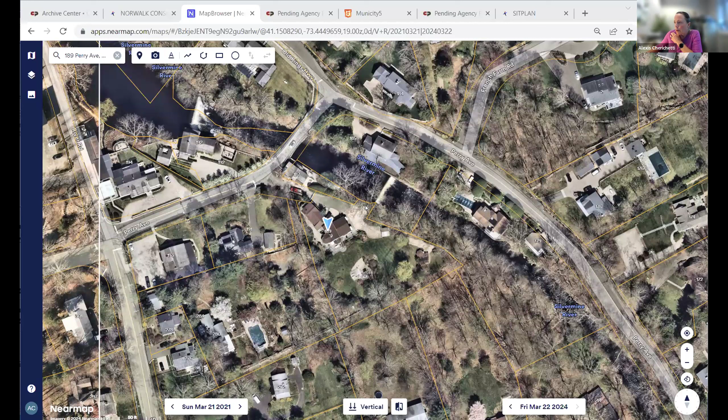The reason that the applicant is here tonight is for some activities that were done without a permit: the expansion of the driveway here, a little bit of gravel here, and the installation of some dry wells kind of in this general location. And I will stop my share, and I believe Mr. Carter is here this evening, as well as engineer Wayne Devanzo. So if either of you... Yes. Hi. Hi, how are you? Good evening. For the record, Wayne Devanzo, Fairfield County Engineering, on behalf of the applicant.

Yes, there was some activity here. As Alexis pointed out, the gravel driveway was expanded. I'd like to share my screen if I could. Yes. So you could hopefully see. Does everybody see that? Yes. Okay. Yes, so the gravel driveway was expanded in this area, if you can see where my cursor is, and a gravel area was added down lower.

So to mitigate the extra runoff from that, we did a stormwater runoff analysis and designed a retention system that we will be installing in this area east of the house, beneath the gravel driveway. It mitigates the 2 through 100-year storms. The 2 existing dry wells will be abandoned, and the majority of the roof will be routed to the new retention system. Erosion controls will be placed along the perimeter, as shown here. Double silt fencing during construction, and at this time, Alexandra Mock has advised me that there is no planting plan at this time.

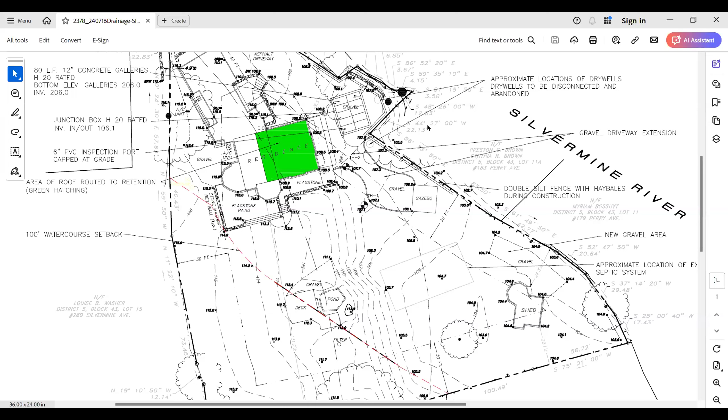Alexis, could you share the aerial photos of the site for us, just to refresh everybody's memory, especially for those who may not have been around in June and may not have seen this originally? Absolutely. So as Wayne was saying, actually, here's what the property looked like in 2021. So existing, I think it's an asphalt driveway in the front that then transitions to kind of a gravel courtyard. Previous property owner had received a permit from you a few years back to expand the gravel area. There's a stone wall that runs along the property and along the river.

And the work involved expanding the gravel driveway. There's a new gazebo, and then there's this new gravel area started. We had received a complaint about digging, and the digging was the installation of two dry wells that were in the location shown on Mr. Devanzo's plan.

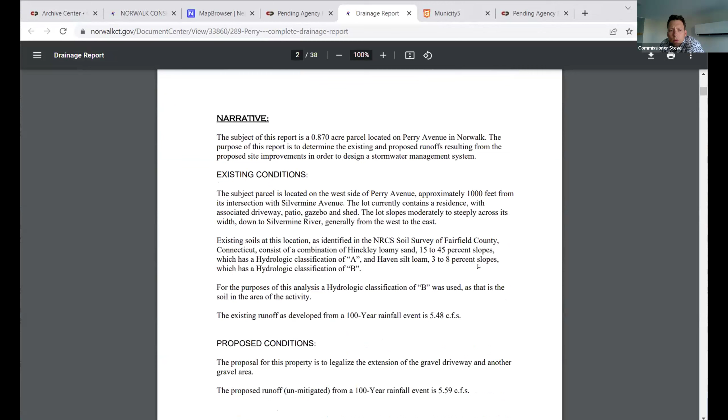Well, the proposed is - I mean, this is me just asking questions, not antagonizing - is 5.59 cubic feet per second versus 5.48 cubic feet per second. So I believe that's for the 50-year storm, I think. That says 100-year on the screen. Okay, I'm sorry, it's a 100-year storm, yeah.

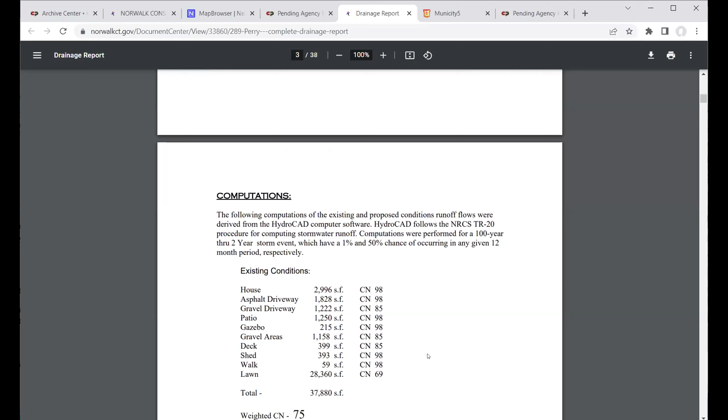And if you look across, it's the other storms, 2 through 50 as well, which are also mitigated. If you compare the top line to the fourth line, you'll see they each decrease. So the area is bypassing retention plus overflow. We want those numbers smaller than the existing runoff numbers. Is that what we're saying? Correct, that's right. Just spell it all out.

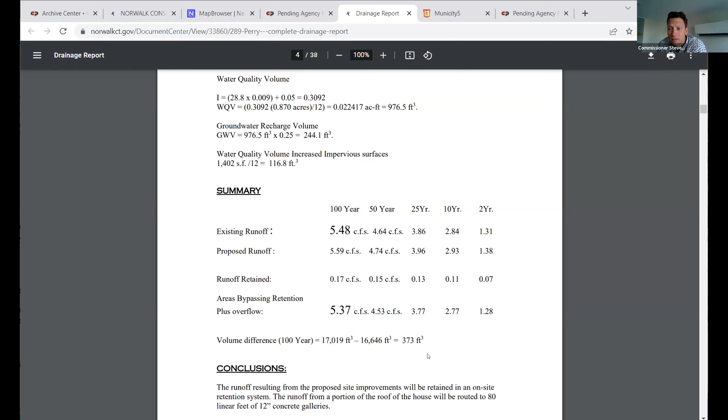Catherine, do you mean to have your hand still up, or? Okay, thanks. Okay, do others have questions about what's being proposed? Does anybody feel strongly about adding landscaping anywhere for any reason? Do we feel that the proposed site plan includes all the information we might need to see?

I don't see the landscaping in the plan. There is none, essentially. And I think what's going to happen is the edge of work will go right along the property line there with this double silt fence, and really the only work that's happening is excavation of the main part of the driveway, placing of the subterranean infiltration feature, the Cultec.

And then basically just returning it all to how it is now is my understanding. Is that right, Mr. Devanzo? That's right, yes, the grades won't change at all. A hole will be dug to install the galleries, and then it's replaced - the gravel's placed back, and the existing grading is restored.

Okay. Well, wait, I don't see all of you. Does anybody have a hand raised? No. Okay, if there's no more questions, then I think Catherine, your hand's back up intentionally.

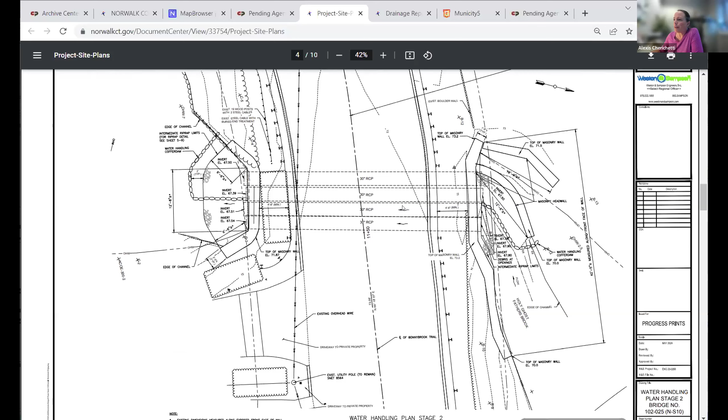I will switch to the application. So both of the bridges are actually a series of culvert pipes that convey the brook under the roadway. This is the first roadway; they're mostly doing work to the masonry wall and the abutment walls. This is the second crossing, with repointing work. This is looking upstream, so here's the roadway, the abutment, and the wall of the bridge, and these are the culvert pipes underneath it.

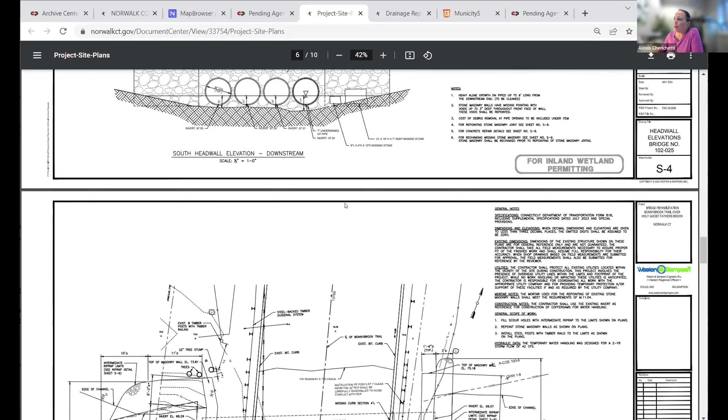They're going to be repairing the face of the bridge structure and repairing some scour holes within the channel itself, where due to the piped flow there's often a concentration of energy that results in erosion. So they'll be fixing those as well.

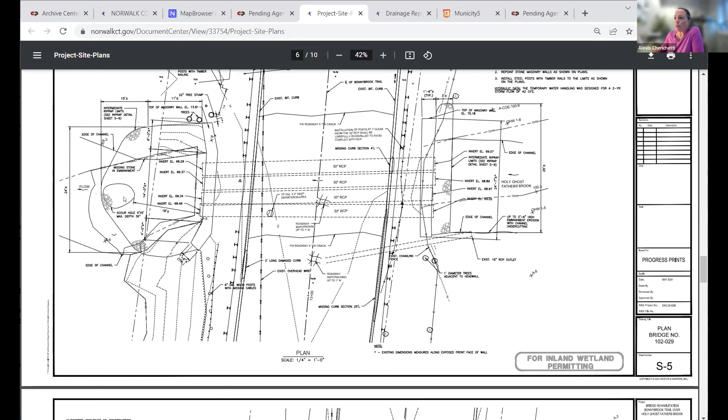They have a dewatering plan where they will block water off at the upstream end for two of the pipes and have it just go through the other two. They'll work on the dry pipes, and then they'll reverse it for phase two. That's for each of the two bridges. That's my very quick summary of the basics.

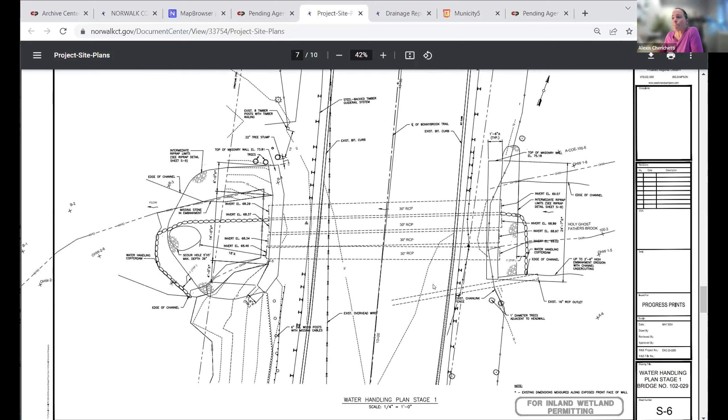During work they're going to be installing cofferdams, which are temporary dams that block off flow from going into some of the pipes, pushing it all into one pipe so they can work in a dewatered area. This is stage one, and then they switch it around so that they're blocking the northern ones, and all flow would go through the southern ones while they work on the northern part of the outlet.

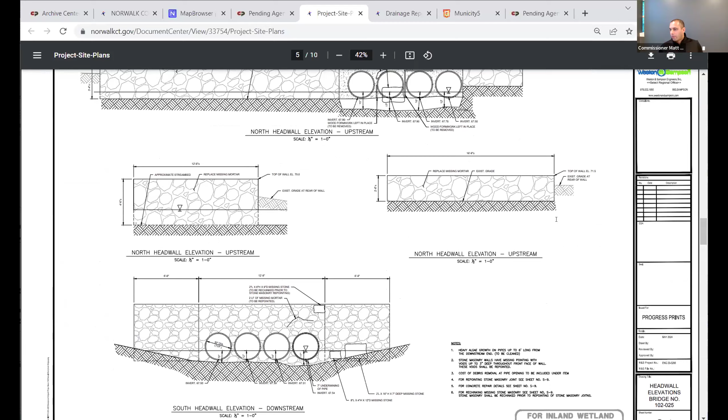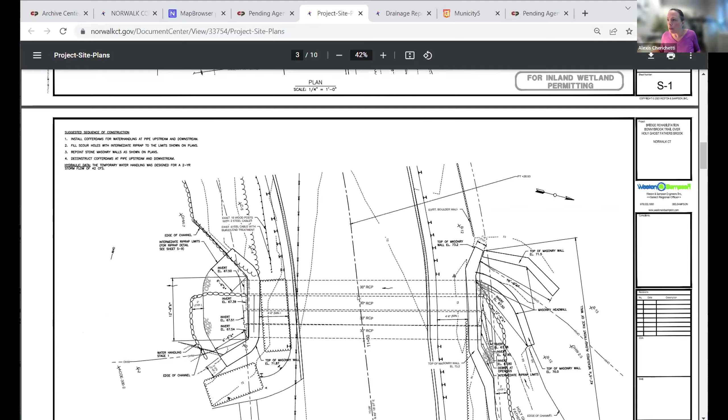So, regarding the terms in the draft resolution, do you feel they're adequate for addressing the concerns discussed in past meetings? Yeah, I think so. There was some discussion mostly regarding the extent of work adjacent to the bridge itself, and whether there'd be a lot of vegetation removal, which there would not be. They did come back and propose an additional landscaping plan that clarifies that a high quality inland wetland native seed mix would be installed where there are some ancillary disturbances.

That's condition number 2, stating any disturbed wetland areas must be seeded immediately following completion of the project, using the wetland seed mix. They gave us a color-coded impact map showing all the potential areas. The in-stream work has some temporary disturbances for installation of the cofferdams and for scour management, and the small areas adjacent are wetland areas that will be disturbed just by accessing the watercourse, which will be revegetated with a robust seed mix. Okay, that was helpful.

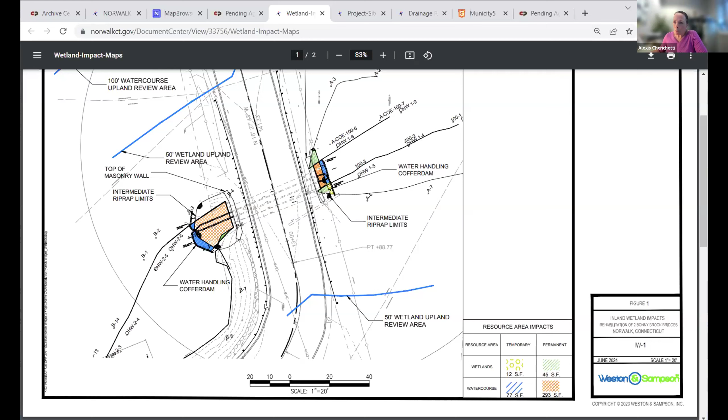Thank you. Absolutely. On that note, I'd like to propose a motion to approve the draft resolution dated August 12th, 2024 for S24-643 as written. Can I have a second? Second. Commissioner Knight, any discussion?

All in favor? Aye. Right. Four, that's unanimous. Thank you, Mr. Stotnick, as always, for a very complete application, and good luck.

Thank you very much, and thank you for having us. And as always, it's a pleasure dealing with the commission. Ditto. Take care. Thank you. Good night. Have a good night.

Okay, so next on our agenda is a public hearing, but that can't start till 7 o'clock, so I'm gonna move to amend the agenda to move forward to enforcement actions. Okay. 24-1065. Can I have a second on that? I'll second that. Any discussion?

Yeah, and I have little ones running around.

All in favor? Aye. All right, thanks. Okay. So for the enforcement, it's a show cause hearing, and I'll just quickly go over how a show cause hearing works.

So the first step is that I explain to the commission why I have issued an enforcement order, and then the commission gives you the floor to dispute anything that I present, or to give them any additional information. And then once that concludes, the commission at the end of the evening will make the determination whether to uphold the order, to withdraw the order, or to modify and uphold the order.

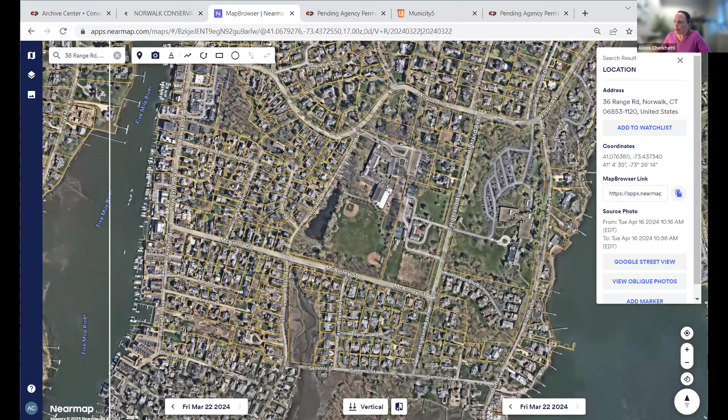Farm Creek Brook runs through the rear of all the properties on Range Road, crosses Witch Lane, and continues down along Indian Spring, and then eventually discharges down at the Rowayton School, where it then continues to be tidal south of McKinley Street. That's kind of its watershed. Again, this is the watercourses.

This is an aerial photograph taken in March 2024 that shows the existing conditions that I and another staff member confirmed in a site visit earlier this month. The property has a gentle slope down to the watercourse from the rear of the house, and I'll switch to some other aerial photos. But these are the newly constructed retaining walls. They do roughly mimic the same location as some previous retaining walls on the property, but we would argue that the resulting vegetation or lack of vegetation is very different than what was there previously.

The wetland line is approximately here. And so all of this area is wetland adjacent to the pond. This green area is astroturf, as is this green area. This is a planted bed, and then this is a gravel patio here. I'm going to just switch to

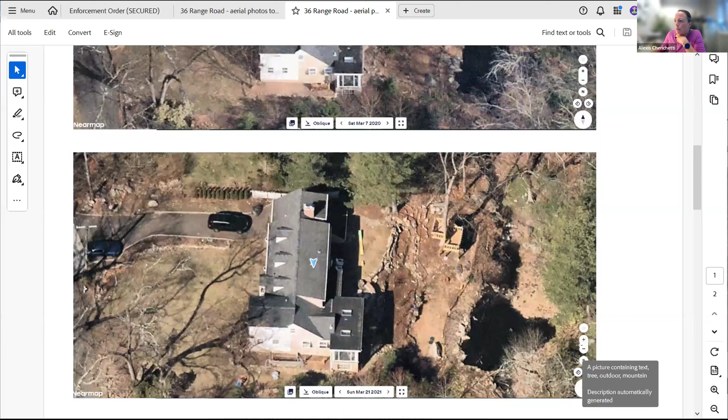This is that same oblique view in the year 2020. 2021. 2022. And then 2024. And then I'm just gonna lastly share these site photos.

So these are site photos when we visited the site a little over a week now. This is looking down from the top patio level off the back of the house, looking at the first level, which is a retaining wall and then a planted bed, and then down to what I had previously described as a gravel patio and then an AstroTurfed patio. The wetland line comes to approximately here where my cursor is, so just below that first planted bed.

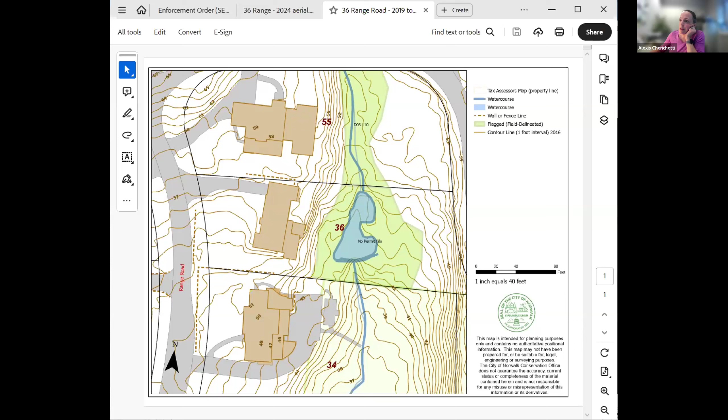And then this is, again, that same 2016 photography. The wetland line is this light green line. And as an underlay, I now have added the 2024 aerial photo. And so the wetland line encompasses that gravel patio area and the flat AstroTurf area right up to the pond.

And so the Andersons, who are the property owners, are here tonight. And if you want me to share any of the photos that I just showed, just let me know and I can share those. Yeah, thank you. I really want to add a lot of context and information that really explains a lot of this. There were some important pieces that I think might have been misrepresented, and through no fault, Alexis, of your

own. First off, as Alexis called out, I would divide this into two areas. There's the upper area outside of the wetland, which was the retaining walls, planter beds, and upper patio area. And then the area that she highlighted within the wetlands. Now, I'd love to talk about each of those individually. And by the way, am I allowed to screen share with some photos? Mm-hmm. Okay, great, thank you.

Drew, sorry, could you share the landscaping plan, just so the commissioners can see the landscaping plan as you talked about it? Certainly, I'd be happy to share it. Let's see. Is that working? Maybe just enlarge it a little bit. It's pretty small on the screen.

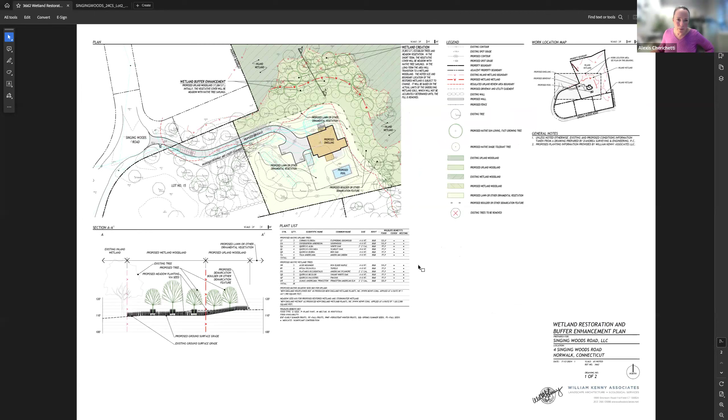Gotta bear with Adobe. It takes a minute sometimes. Yep. Assuming all the color will be restored to the document. Well, okay. Does this work? It's a little small. It's the only way it's preserving the colors there. We can get that a little bit closer, but okay.

Yeah, so with that, the call outs for the trees, all the uniform circles, those are the proposed plantings. So they weren't necessarily called out in terms of which individual species is in each location, but regardless of that fact, all the species are indicated and the quantities are to be installed.

To move on to the next question, there are tall stumps of trees to be maintained in place. For the trees to be removed, sure, that would be acceptable depending on the disturbance. Most trees, aside from ones that are unavoidable, are related to correcting the violation. So to fully remove the violation fill, it will likely need to be properly removed. So dependent on that, some trees may be able to remain as stands, but ultimately, it's dependent on the correction activities.

And then for the demarcation feature, I believe it is boulders. It was specified on the bottom of the document. I don't know if you can see me highlighting that. We do begin with saying boulders or other demarcation features. I believe the comment was specifically related to what type and size. It will likely be boulders, I would assume. I couldn't say for certain, but boulders are pretty typical and they're a good demarcation feature that looks fairly natural. So I assume they would use those.

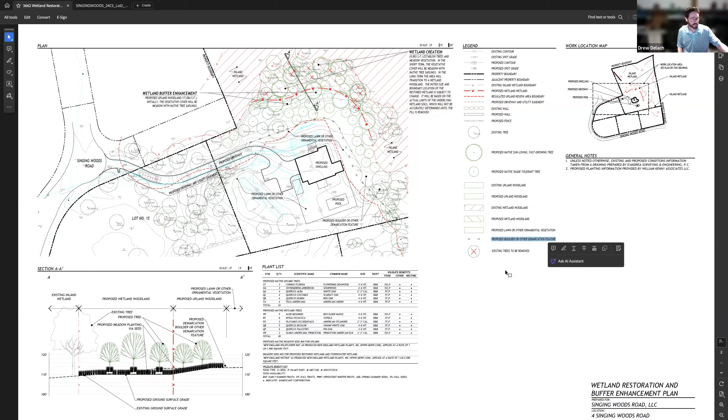And then for proper safeguards for maintaining installed plantings, it's not specified as organic on the second page here. This is the one I believe was called out. But we do recommend, maybe not on the document in this case, but we are always in support of using organic treatments for these sort of things. So organic deer spray, if we would like to see that be used, then that would be just fine. And I believe that was all of the comments that were raised.

Okay, would anyone else from the applicant's side like to present additional information? I think first we'll ask commissioners to provide comments and ask questions, and then we'll open up to the public. So I don't see any hands up, so I'll go ahead and say Alexis, with regard to Dr. Danzer's letter that Mr. Delach had summarized for us, at least as far as the wetland restoration plans, section B. Could all 5 of those comments be addressed via conditions in a memorandum?

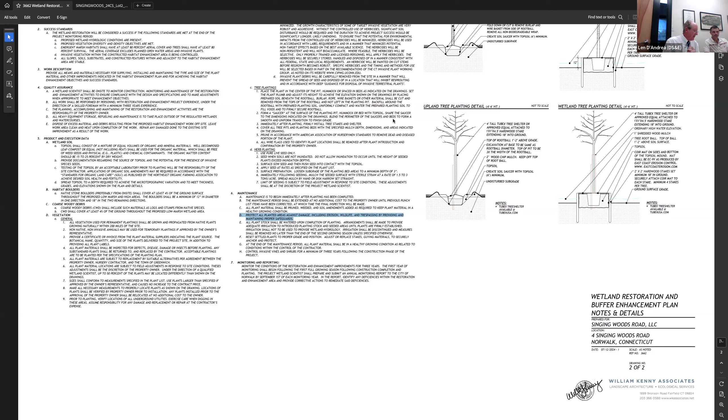Could you share your screen? Could you guys share your screen? Yeah, sure. Sorry, just give me 1 second here. Yep, there you go. Okay, thank you.

So again, if you look at the contouring closely, you'll see that we're running this driveway as close to grade as possible. And that one area where we're showing that low profile wall, if you look closely at that too, that's where the grade is dropping off. So if we start to pull this farther to the south, we're just going to get into more earth that's unnecessary. And it also really starts to compromise our septic location.

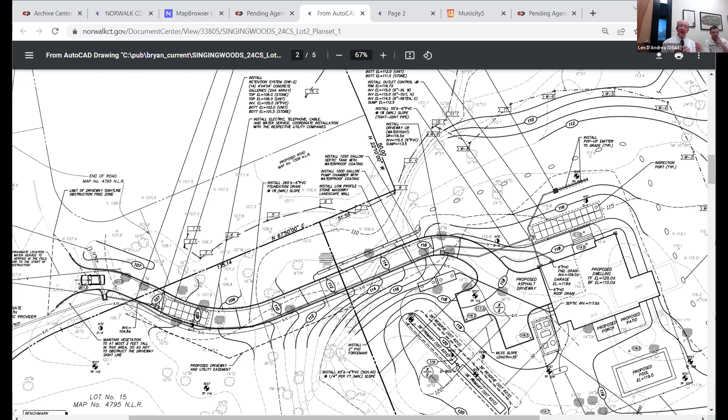So you think that we have a nice big piece of property, but I think you realize that it's encumbered by a lot of wetlands as well. So we have down in this location our septic location, and that is the best septic location. We don't have a lot of room to keep pushing or sliding that around as well. So I think this is a nice balance of minimizing tree removal. In fact, there's some nice trees in the head of the right-of-way that won't be touched now.

It does come into the adjacent property such that now we have a full 25-foot buffer. We have it curbed. We have an infiltration system. So I don't see the benefit of trying to push this driveway any farther and really just having like an S-turn to go a little bit deeper in and come back around and go around our septic system. I think this works out.

Well, the benefit of keeping disturbance away from the wetlands is to minimize any potential impact on the wetlands. So as far as we're concerned, any additional foot that you can get away from the wetland is a good idea. But obviously, we understand there are other things at play. But are there any wetlands to the south on either property, lot 15 or the proposed? No. I think our biggest concern in sliding this is our septic system. There's very little area for us to adjust that.

Well, but it doesn't have to look just like it is. I mean, septic systems can come in a variety of shapes and achieve the same infiltration, right? Or no? No, not necessarily. We have to address minimum leaching system spread. We have the soils that we have to contend with. We really found that, and a lot of times we go into it this way. In fact, on some of these lots, I'm not sure if it was this one, we went back out there and did more testing with the health department to make sure we have selected the best system.

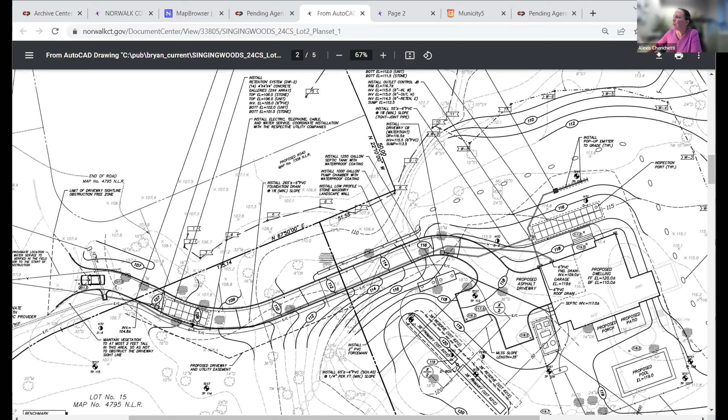Okay, thank you. Any other commissioners? I don't see any hands up. You'll have a chance to chime in a little bit later. Alexis, do we want to open up to public comment? Yes. And so if you'd like to speak, please use the raise your hand feature and we'll allow you to speak. And so first to have hands raised is Mr. Danzer.

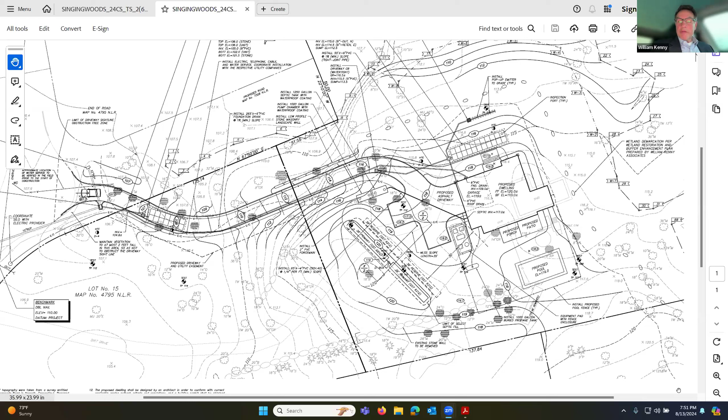Okay, I might just add a few things real quick. Sure, hit it. Sorry I wasn't here earlier, had a conflict at another hearing. But I want to say a few things. One, with regard to the tree planting and deer issues, our package has two drawings. One is the plan view with a plant list, cross-section plan view, plant list, and the second sheet has quite detailed specifications for the plants proposed, as well as how they get installed, and also a 3-year monitoring program for invasive vegetation. We also have tree planting details in there.

One reason we spec a high density of trees and not shrubs is exactly because of the deer. We find a combination of deer and invasive vegetation, so we try to plant a lot of trees to get shade to help control the invasives, because many of them thrive in full sun. We want as much shade as we can get to control those plants.

In our tree planting details, we show protection from the deer, including tree guards for the trunk, since they often want to rub antlers on the trees. So we do show on our drawing that the plants will be protected from that activity.

We don't often specify the exact type and location of each tree. We give quantities, sizes, and different species, and then propose to be on site and adjust the locations and mix of plants so we can deal with existing conditions, other trees, and other factors. We allow for that flexibility knowing we'll be on site during the planting to locate all the plants.

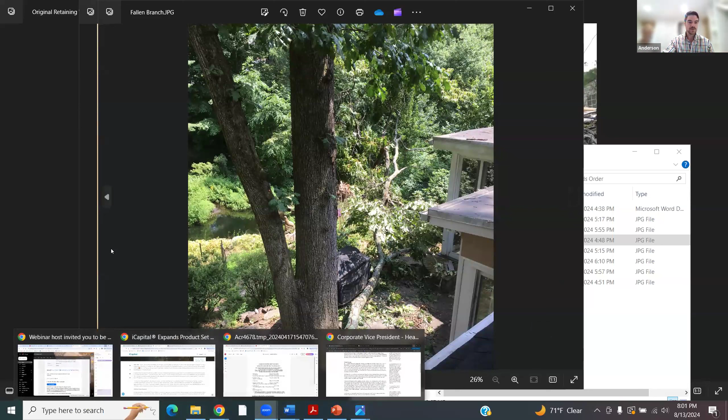And then we actually removed it on a different day, when this happened in our backyard. Our oak tree fell into another oak tree, which fell into our neighbor's house. And you can see this one behind it, which is the one removed. When we had this cleaned up, we also had that other oak tree removed on that same day, which frankly, for the safety of our kids, was just the right approach. But that's the only tree in our backyard we have ever removed.

Others have fallen, but in the upper area where we did the most significant amount of work, where we replaced our patio and our terrace with newer versions and put the retaining walls in, we replanted planter beds. I want to emphasize that while we didn't know that we needed a wetland permit, otherwise we would have applied for one at the time, we retained much of the original design and effectively replaced a similar quantity of vegetation with the exception of that oak tree.

And so that's what I want to highlight about the upper area, which was the significant amount of work that we had contract work done in. The lower area, which is probably the more pressing issue, is where the wetland boundary actually is. There, again, the letter cites the removal of vegetation and shade trees, understory trees, and ground vegetation. And what's in the letter but was not vocalized here was the bamboo as well.